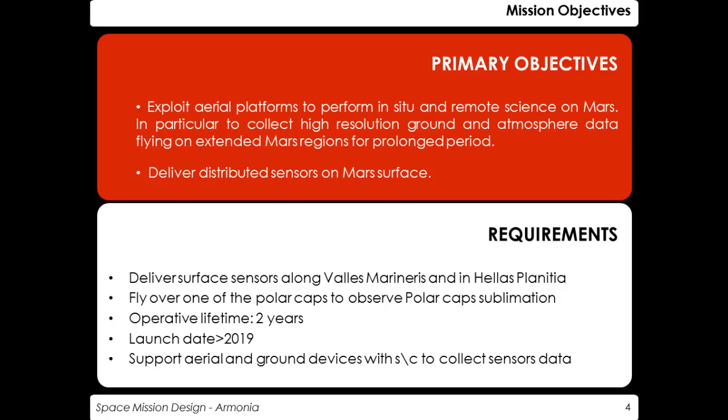All this has to be done with some constraints. In particular, we have to visit peculiar regions like Valles Marineris and Hellas Planitia, and also the polar caps during the period of sublimation. All this while trying to obtain an operative lifetime of at least 2 years, along with some other constraints related to the launch date and the data relay.

Looking more in detail at the phenomena we are going to observe, we have divided them into three major regions. First, in the tropical region, we would like to observe the genesis of local dust storms, dust devils, and other phenomena like the sources of methane.

In the polar region, we would like to observe for sure polar cap sublimation, and again the source of methane. In addition, we would like to remotely observe the residual magnetic field of Mars.

Our mission is based mainly on the use of 3 superpressure balloons as the aerial segment. We decided to deliver 2 to the tropical region and 1 to the polar cap. This allows us to reach the 2-year operational lifetime, since the lifetime of a single balloon is not sufficient to cover the whole mission. This is not done continuously, but at least they will cover the most scientifically relevant periods on Mars.

We will also rely on a dedicated entry vehicle, one for each balloon. This way we can inflate balloons directly in flight, which is the most promising technique for inflating balloons.

This will also allow us flexibility in the regional deployment of our balloons, and also in the timing of deployment. We can deploy them directly on the regions we would like to visit without the need for guidance to reach the most peculiar regions, and we can also try to reschedule the mission if something goes wrong, for example. So it gives us robustness, flexibility, and adaptivity.

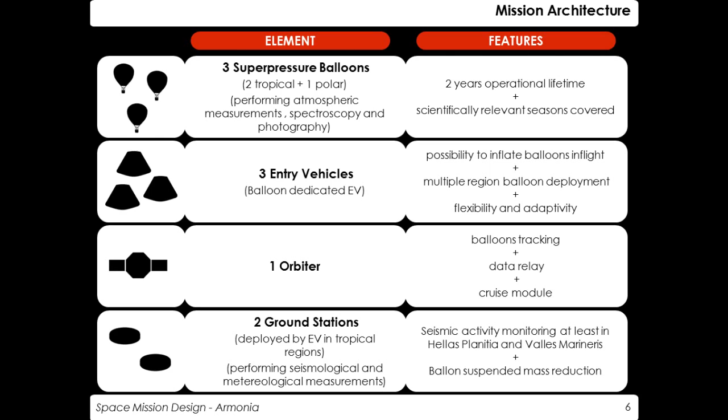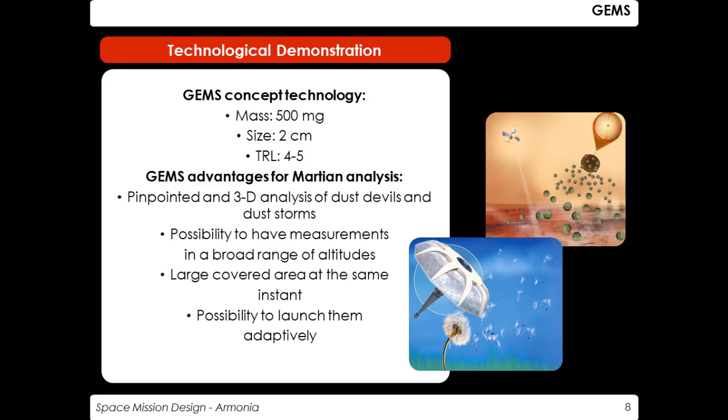Finally, we will have GEMS as a technological demonstration. GEMS are nanoscale sensors. They were first thought of as an alternative to balloons, but then, due to their limited lifetime and some telecommunication issues, they were discarded and then reintroduced as a technological demonstration. They can be released by balloons during a peculiar period or during some relevant events. There are also representative models of the sensor.

Looking at the timescale of our mission, we will mainly have 3 phases. After the launch, we will have the transfer from Earth to Mars. Then we will have an aerobrake of about 150 days to save more propellant and make the mission feasible. And then we will have the 2 years of operational lifetime, ending with the disposal.

Looking more in detail at the operational lifetime, we will first have a 1 month setup, during which we will observe Mars and try to set up everything, and maybe reschedule something or be adaptive to the mission.

Then we will have the 18 months measurement campaign, during which there will be released the 3 balloons, according to what we have decided.

Finally, we will also have a buffer slot of 5 months for further measurements, or if the balloons survive longer than expected we can keep collecting data, and also from the ground station we could keep collecting data. We could also rely on releasing balloons in common periods to try to have simultaneous measurements.

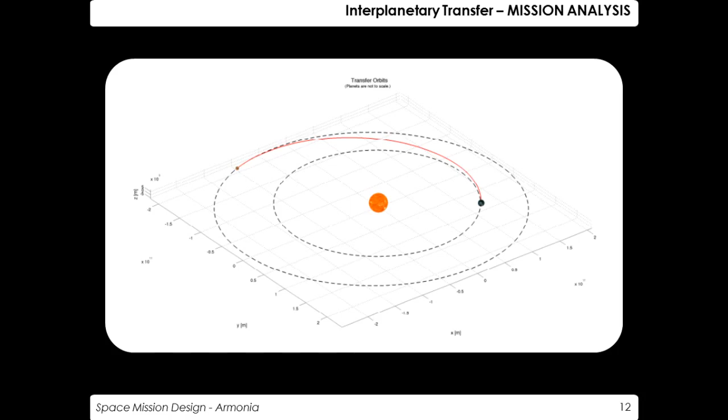For the insertion into the operational orbit, we first considered a direct transfer with a one-shot maneuver, but this gave a delta V of 2 km per second. Since we have a massive dry spacecraft and the delta V is quite high, no launcher is usable to launch such a high mass with the given C3 we have, so we need to reduce the delta V required to insert into the operational orbit.

What we selected was an aerobraking maneuver. We chose it because it's flight proven twice at Mars, it doesn't prolong the interplanetary transfer too much, it doesn't have strong requirements on the spacecraft configuration, but it leads to large delta V savings.

We used a simplified model for the simulation: we neglected Mars rotation and assumed an exponential model for the atmosphere. For the initial orbit, similar to the MRO mission, the apocenter is just inside the sphere of influence of Mars, and the pericenter equals the operational orbit we selected.

During the aerobraking regime, we will have a pericenter of about 100 kilometers. This was chosen to minimize the duration and have acceptable thermal and structural loads.

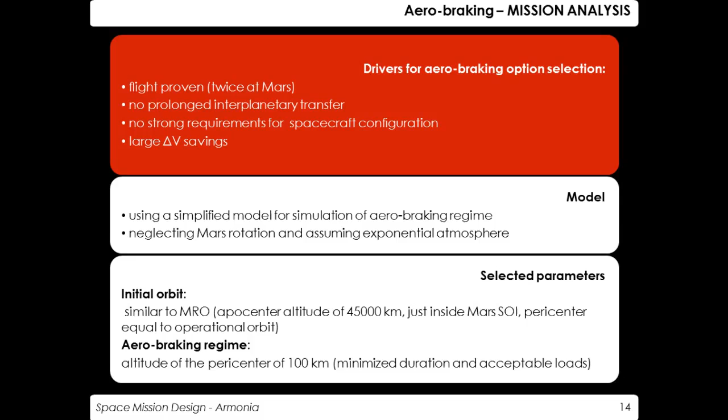So this is the result we get: a delta V saving of 1.2 km per second that leads to a huge mass reduction.

The possible issues were analyzed and solved, since there were almost 5 months to reach the operational orbit, which is fine within the mission timeline. The thermal and structural loads were also analyzed and found acceptable.

For the operational orbit choice, our driver was maximizing the time in view of the aerial and ground segment, so we took data from the simulation of the balloon motion and considered some latitude ranges.

These were taken into account, along with a constraint on at least the possibility of deploying a balloon near the pole, and an altitude of the pericenter not too low, in order not to have too much drag and thus too much station-keeping delta V. We also had some nice-to-have constraints.

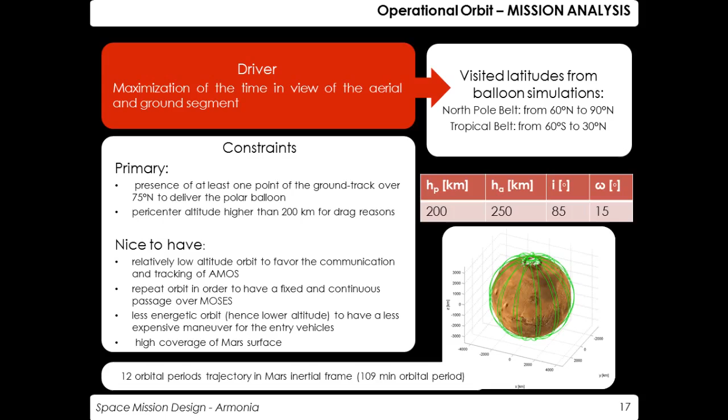Here is represented the trajectory in a Mars inertial reference frame for 12 orbital periods, and you can see it's not a repeated orbit.

For the entry vehicles, we selected a procedure to release them, as follows: we acquire a release orbit slightly lower than the operational orbit, we release the entry vehicle and the related structure, as will be explained later, and then we return to the operational orbit.

For the trajectory of the entry vehicles themselves, our driver again was delta V minimization. We use a model for the orbital phase and the first order Allen model for the atmospheric phase. We had constraints on the velocity at which the supersonic parachute will be released, and also considered the flight path angle, in order to minimize delta V and keep the entry vehicle inside the atmosphere.

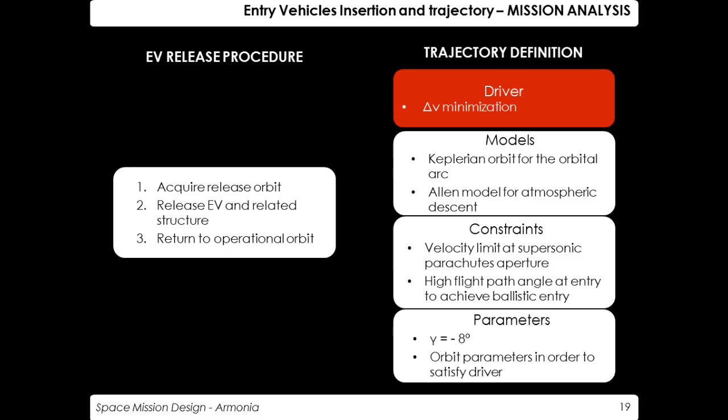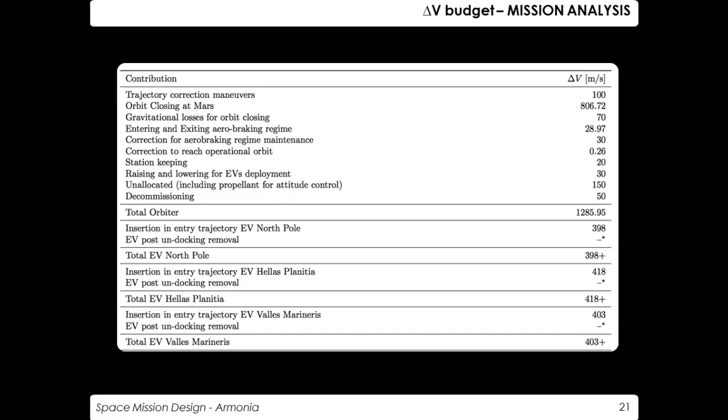Finally, I will present the delta V budget, covering the contributions I didn't highlight before: trajectory correction maneuvers, correction during the aerobraking regime to keep the pericenter altitude constant, station keeping contribution, and decommissioning phase. The delta V budget was made not only for the orbit, but also for each of the entry vehicles. I will now leave the stage to Claudio Pulsi, who will tell you all about the balloon design.

Thank you. I will try to explain the process that brought us to the design of the balloons that support the aerial platforms. First, an analysis phase during which we studied the environment of Mars, selected the technology for the balloons, and asked ourselves whether we wanted to rely on a guidance, navigation and control system on the platforms, plus the strategy for the buoyancy of the balloon.

Then a sizing phase, during which we computed the dimensions of the balloons and chose the material for the envelope, and finally produced two numerical models as validation of our design: a thermodynamic model and a flight dynamic model.

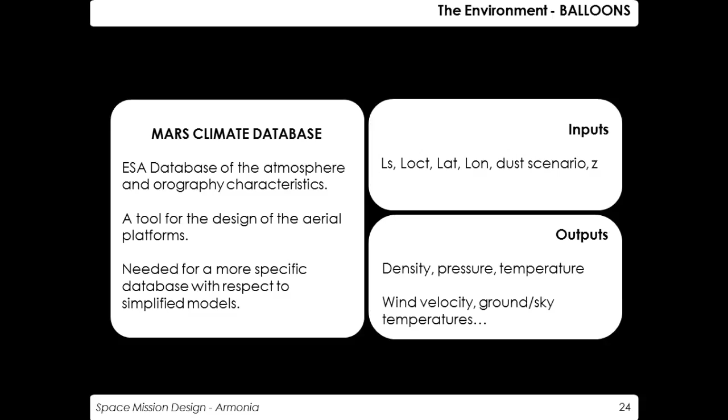For the environment, we used as a tool the Mars Climate Database from ESA, which takes as inputs space and time coordinates on the surface of Mars and gives as outputs the main properties of the atmosphere, such as density, pressure, etc.

For the technology, we investigated existing options, but in the end we selected the superpressure balloon.

The superpressure balloon is actually a balloon that has a constant volume, supported by a higher internal pressure always greater than the environmental pressure, and it flies at a constant density level. The positive aspects of this technology are that it has already been used in the Vega mission in 1985 on Venus, it has a longer lifetime compared to other technologies, and it has a simpler design because of the constant volume. The negative aspects are related to the fact that since it has a constant volume, the buoyancy capability relies on the external density of the atmosphere.

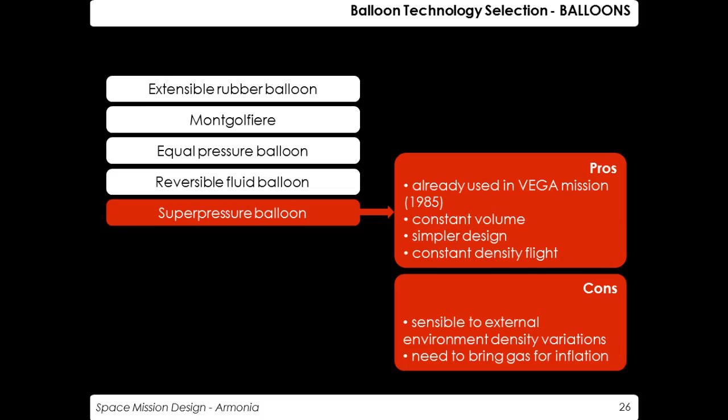For what concerns the guidance, navigation, and control system, this technology has already been investigated by NASA, as a sort of wing attached very far below the balloons, in order to experience different atmospheric conditions and produce force that could direct the motion of the balloons.

With this technology, we could have optimized the exploration capabilities of the balloons and performed maneuvers to avoid impacts from orographic obstacles. But we would also have increased the complexity of our system, increased the mass, and increased the dimension of the balloon.

So we decided not to rely on a GNC system, but rather on free motion of the balloon. A proper design of the floating density of the balloon was needed.

As I said, the superpressure balloon flies at a constant density level. So we had to choose the density through some criteria, and we created a model of isodensity surfaces in the atmosphere of Mars, marked with two performance indexes, such as the altitude experienced by the balloon.

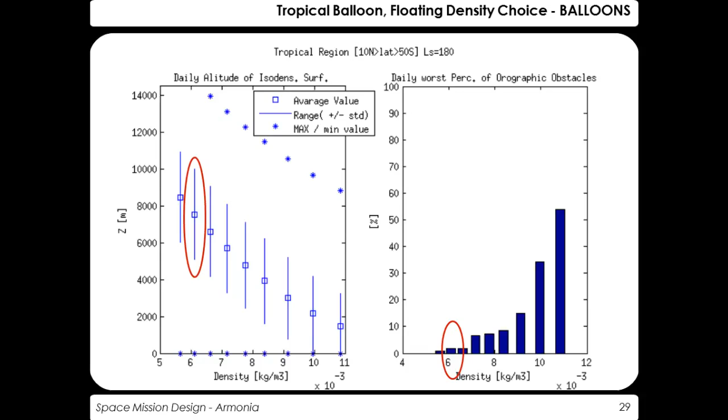For example, for the tropical balloon, we made a compromise on the percentage of orographic obstacles at that density value, and an altitude low enough to properly do the scientific operations.

And so, as you can see, we also have visible criteria to observe the results that we obtained.

For what concerns the balloon sizing, we followed static dimensioning through the Archimedes principle and exploited the two concepts on which superpressure balloon technology is based: superheat and superpressure. Superheat is the delta temperature across the envelope of the balloon, which must stay within assumed values, and superpressure is the delta pressure across the envelope, which must always be greater than zero.

With those as inputs, we came out with the actual sizing of the dimensions of the balloon.

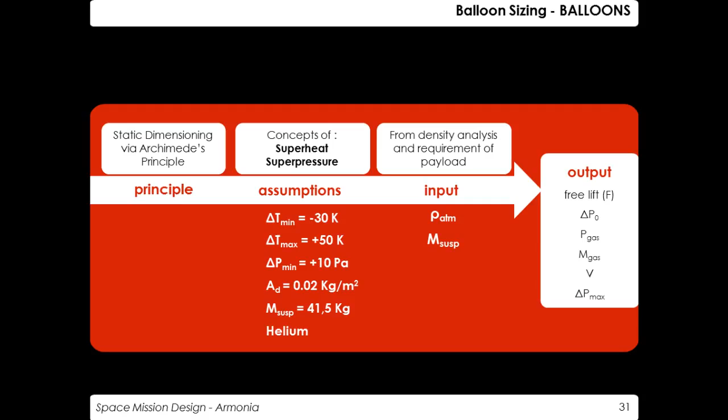For what concerns the material, we chose to rely on a composite envelope material in order to match all the requirements such as strength, stiffness, and in particular permeability of helium, because we wanted to increase the lifetime of the balloon. The UV resistance is also a major concern in the atmosphere of Mars.

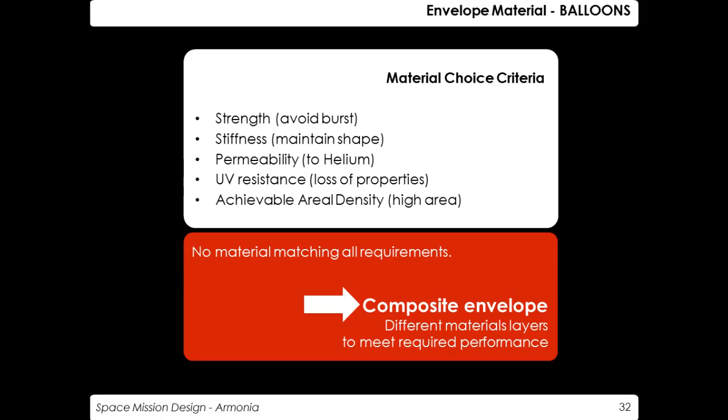We selected a 3-layer composite material: low density polyethylene on the external side, fiber spectra in the middle, and mylar inside. Two designs, one for the polar balloon and one for the two tropical balloons. The tropical balloons are bigger because they rely on a lower floating density.

In order to validate the assumption on superheat and superpressure, we made a thermodynamic model of the balloon, considering all the thermal sources, including internal reflection and transmission, and convection, natural inside the balloon and forced outside considering the winds.

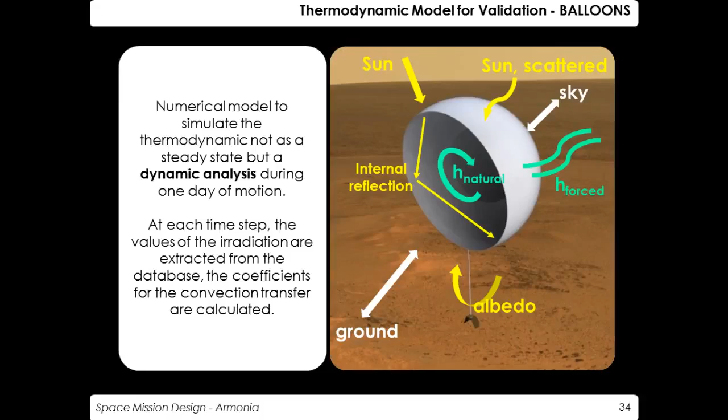We had to check that the superheat delta temperature was always under an upper limit, and the superpressure higher than a lower limit. And we checked that the design could actually work.

As a last tool for validation, we made a fluid dynamic model of the motion of the balloon, extracting from the Mars Climate Database a mesh for the atmosphere of Mars that provides, for many points on the surface, inside the atmosphere and over time, information on the characteristics of the atmosphere.

We simulated the vertical and horizontal motion in order to understand if the correct altitude was reached, and also if the decision to discard guidance navigation and control was made for a good reason.

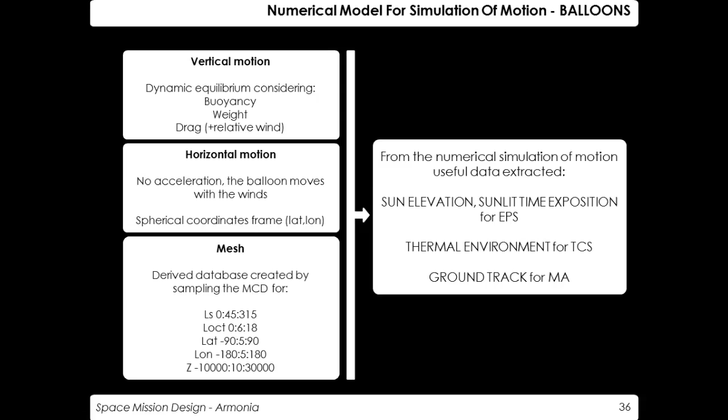We also extracted from the simulation interesting results for the EPS subsystem, such as sun elevation and sunlit time exposure of the balloons, for the thermal environment, for the thermal control system, and as Amadeo said before, the ground track for mission analysis.

This actually helped us discard the GNC hypothesis, since we saw that the balloons performed the required motion. Now I leave the word to Vincenzo Pesce, who will talk about the payload of the balloon.

Good morning. We talk about the gondola, that is the core of the AMOS segment. We have to perform some analysis and observe some phenomena such as the polar cap sublimation, thus the dust devil formation.

For this reason, we have selected instruments that always have a high TRL, except for the ultrasonic wind sensor, the µMIMAFTS, that is a spectrometer that was developed here at PoliMI.

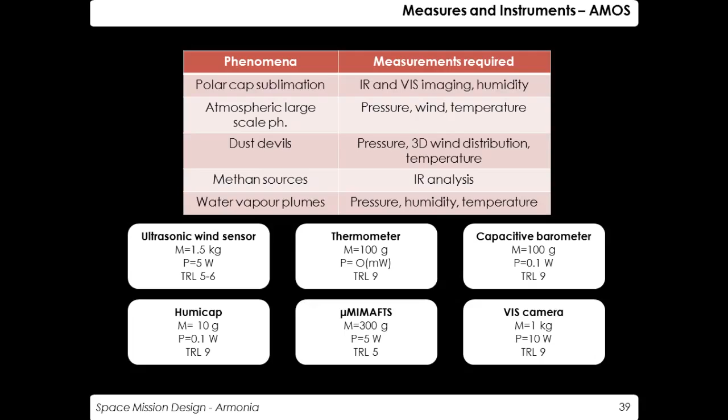Going to detail of the configuration, the main driver of the configuration is the power requirements, because we have to face the low irradiance levels present on Mars. So we have to have larger solar array area, in order to also satisfy the constraint of the volume, the limited volume of the entry vehicle.

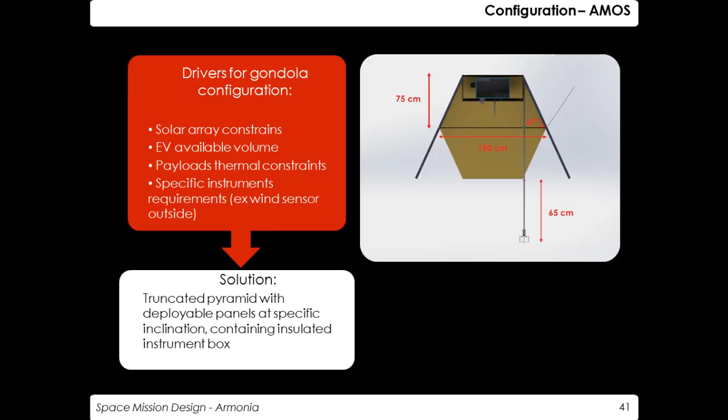We have decided to have a truncated pyramid with extendable body-mounted arrays. Going to detail of the configuration, we have this kind of electronic box with a radiator in the bottom part connected with its switches.

The video shows the deployment of the solar arrays and the deployment of the boom here, the boom of the wind sensor.

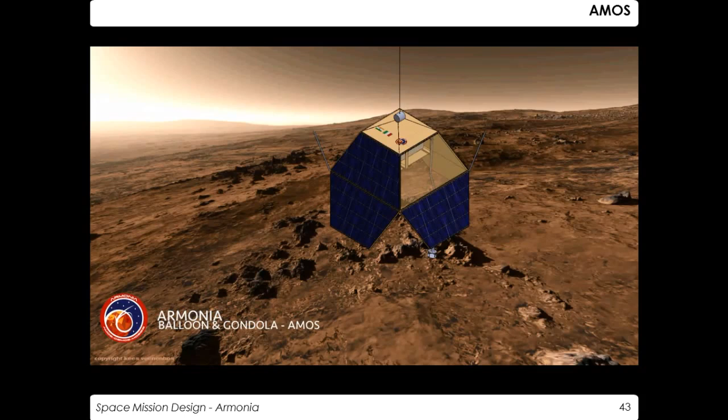Going to detail of the subsystem, we start with the electrical power subsystem because it's the main driver for the configuration. So we have decided to have a classical, reliable photovoltaic system with 4 extendable body-mounted panels.

And the secondary battery, we have decided to use a lithium-ion battery. We have also decided to have a sizing strategy for this kind of subsystem, because fixing the area and knowing the irradiance during the day, we know also the available power for our system. So knowing the value required by each subsystem in each mode, we can try to fit the shape.

Here we have science mode and telecom mode that are the modes requiring more power. So we can always satisfy the requirements in terms of power with our available power.

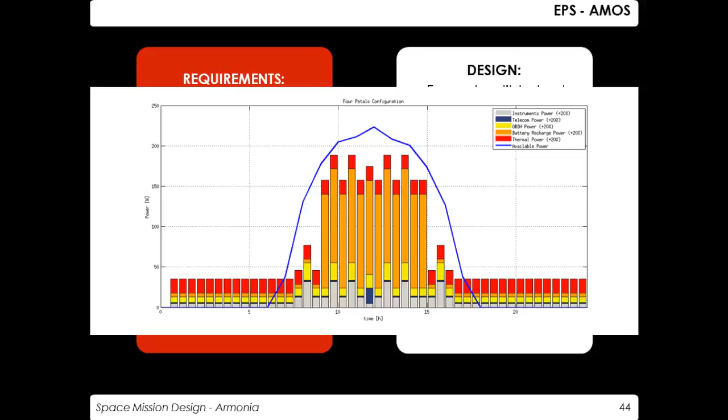Here we have the power budget and the mass budget of the system. We have decided to use a PCDU with a direct energy transfer and a regulated bus, mainly because of the presence of the lithium-ion battery.

Then we have the thermal control system that is driven by the low power available. We want mainly to remove heat from the hot equipment during daylight, but we also want to minimize heat losses during night. In order to do this, we have decided to have a night thermal insulation, also a variable thermal conductive path. Going to detail of the configuration, we have this box, the electronic box, connected to the radiator.

As already said, with 4 paraffinic switches, this allows us to dissipate heat from the electronic box during daylight, but also to decouple the electronic box from the external environment during night.

We have also the electrical heaters unit here and also on the wind sensor, in order to heat up the system, and also 5 RHUs.

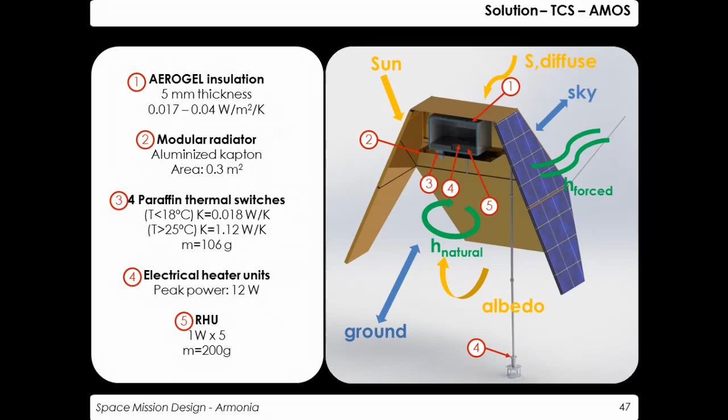With this kind of configuration, we can see how we can respect all the temperature ranges for each element, both in the worst hot case and the worst cold case.

Here we have a mass budget and a power budget. We have decided not to use MLI because of dust and atmospheric issues, and we are focused on the study of the thermal conductive path because it's critical for a strong design of the thermal control system.

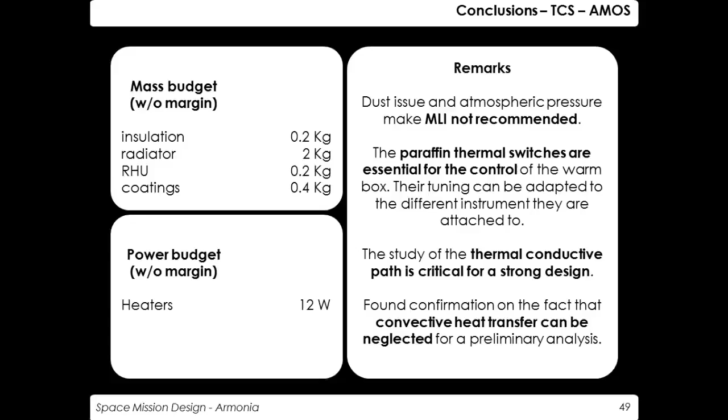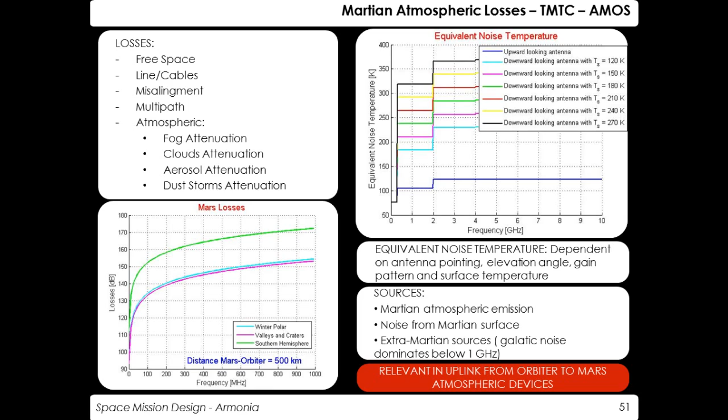We've also made an analysis on equivalent noise temperature, considering an upward-looking antenna and a downward-looking antenna. With an upward-looking antenna, we can see how the equivalent noise temperature is lower, so we decided to use this kind of configuration.

Going into detail of the link budget, we are constrained on the power, the amount of data, and the visibility windows depending on the orbital motion. So we decided on this signal-over-noise ratio, considering margin and the wanted bit error rate.

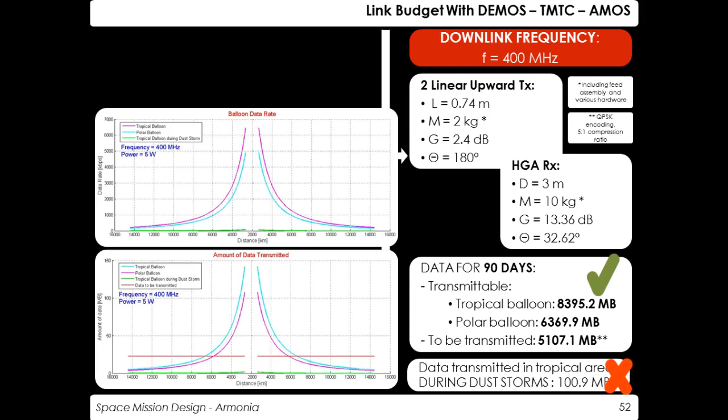We can also see how during dust storm we cannot transmit almost anything. So this is not a good solution, not a good situation for our telecom subsystem. In tropical balloon and polar balloon conditions, we can transmit enough data, but during the storms we can't.

Then we made the finite element model analysis in order to evaluate the loads and the structural response to the loads. Simulating our structure, we evaluated the loads, so gas loads, heavy braking loads, and also the wind on the extended panels during the storms. We have seen how no yielding, no buckling, and no deflection of the boom tip occurs during the storm.

So I will leave the stage to the last part, who will explain the ground station of our mission.

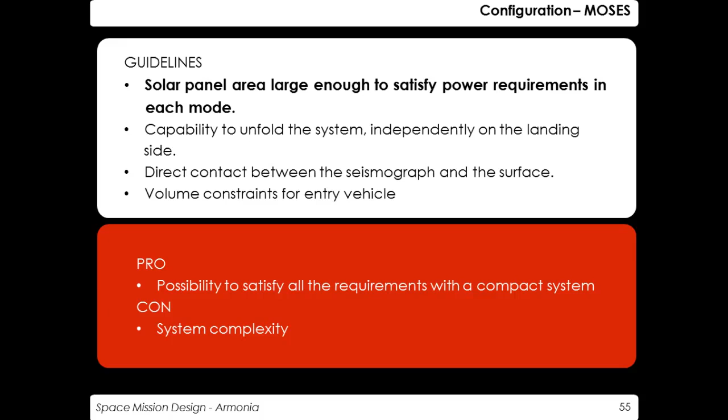Good morning, everyone. I'll be talking about the ground station, also known as the Moses. Starting with the configuration, we had two main drivers for the configuration we selected. The first was that the ground station had to be small enough to fit inside the limited volume of the entry vehicle. The second was that the solar panels, used to power the instrument, should be big enough to last the entire lifetime.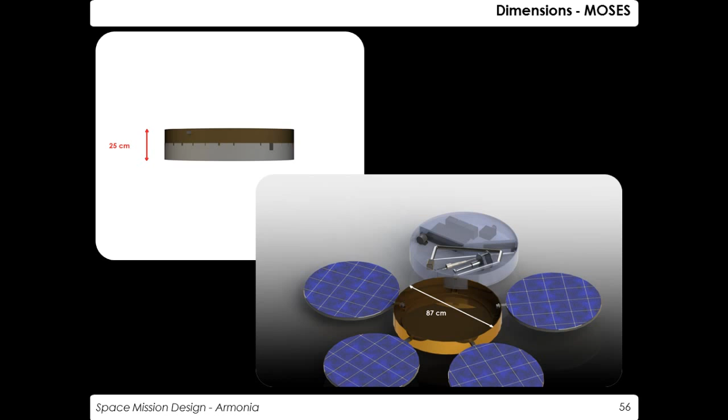Based on that, we decided on a cylindrical disc configuration, 25 centimeters high and 87 centimeters in diameter. It was divided into two sections. First, the top half contained the 4 deployable solar panels, which would be deployed whenever needed. The second half was again divided into two sections, one called...

The warm box. As you can see, it contains all your batteries, PCDU, amplifier, and electronic equipment, while the second half contained all your instruments and sensors needed for the mission.

As you can see in the demonstration, once the ground station touches the surface, first the solar panels are deployed. Secondly, we have a robotic arm which will be used to deploy the seismometer on the ground, to avoid any sort of noise in the data. Then we have also considered using telescopic booms to deploy all the environment sensors, so there is no interference from the ground station to the readings.

As you can see, we have a linear antenna also, and this displays your pressure sensor and temperature sensor booms.

Moving on to the electrical power subsystem, as you already saw, we had 4 deployable solar panels, accompanied by a secondary battery. This was mainly driven by two factors: first, the specific power, and second, the reliability of the system. The idea was to meet the power demands during each mode and phase.

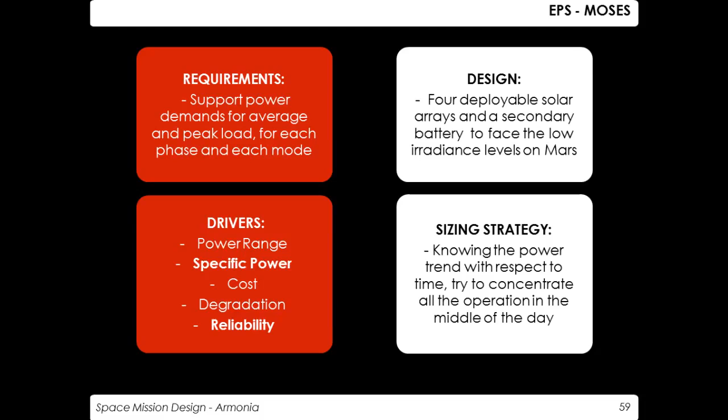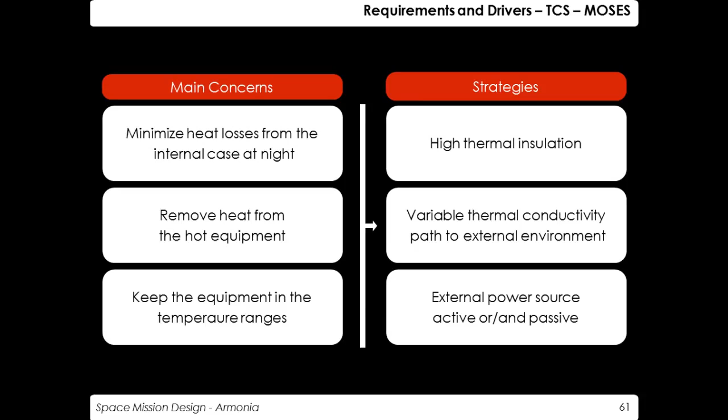Talking about the thermal control, the main idea was the same as the aerial segment: keep the components in their temperature ranges by minimizing heat loss while also radiating any extra heat generated. However, one important limitation for the ground station was its contact with the Mars surface, and during the night that would have acted as a heat sink and depleted the ground station of all its heat. To overcome that and other problems, the strategy applied was use of aerogel all over the surface for insulation, then adding a radiator to the circumferential area of the warm box, controlled by two paraffin-based thermal switches. To heat up the system, we had one electrical heating unit and five radioisotopic heating units, and to finally cover it all up, we wrapped it in golden coating.

Then to conclude the thermal control subsystem, I show you the mass and power budget. One of the proposed technologies here was to use mini loop heat pipes to guarantee a uniform distribution of temperature, being a lightweight alternative.

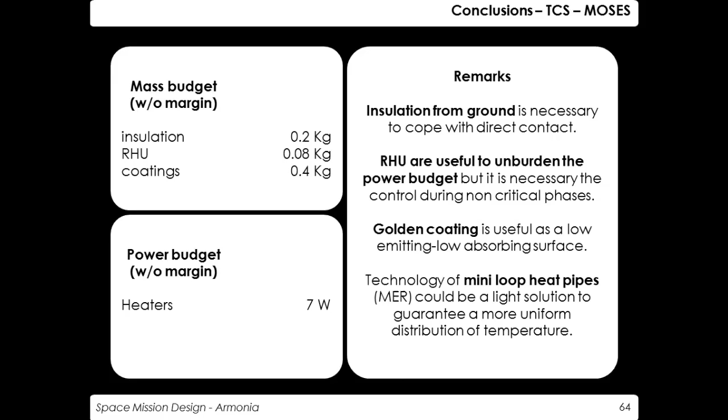Moving on to the onboard data handling, the main driving factor was the selection of the sensor suites that we had. Since we had mass limitations, we tried to find sensors with built-in application-specific integrated circuits. As a result, we decided to use a single electronics board containing a processor capable of delivering 25 megahertz, connected to the sensors using a 1553 data bus, with all data managed using an integrated remote terminal unit. Finally, we had a local data bus to connect the RTU with the processing units, and 16 GB of onboard storage to store all the scientific data.

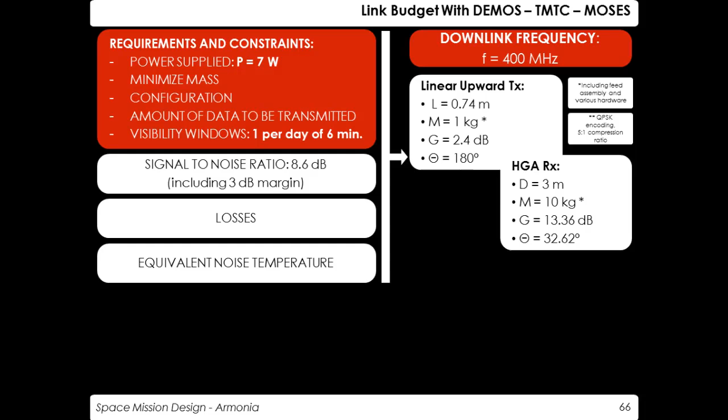Finally, to transmit all the data, we move on to the telecom subsystem. Since we had no regulation on bandwidth usage in the Mars environment, the main drivers came from the power available to the system, around 7 watts, and the losses specific to the Martian environment, as mentioned earlier. Taking that into consideration, we used a signal to noise ratio of 8.6 dB, and came up with a frequency of 400 megahertz, transmitted using a 0.7 meter long linear antenna and received by a 3 meter wide parabolic antenna on the orbiter.

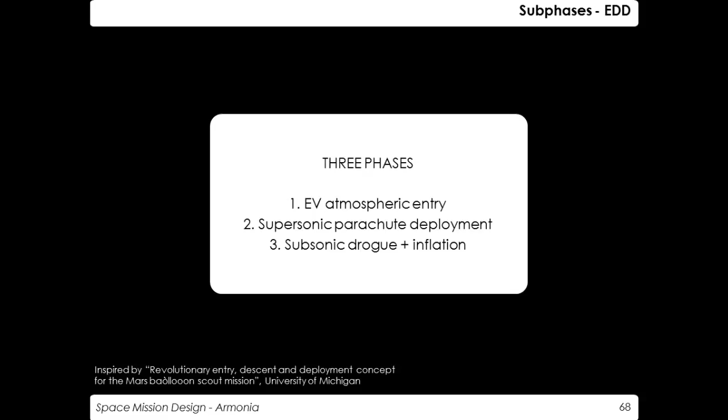Good morning, everyone. I will guide you through the most critical part of the whole mission, probably: the entry vehicle entry, the descent of it, the parachute deployments, and the balloon itself that is deployed and demonstrated. We can divide this macro phase into three sub-phases: first, the entry vehicle atmospheric entry; second, the deployment of the supersonic parachute; and third, the subsonic drogue inflation with the parachute, with the balloon inside. This is a sketch for the whole phase: 1 and 2 are the entry vehicle, 3 and 4 the supersonic parachute deployment, and 5 and 6 the subsonic drogue release, the violet one, very big, with the balloon inflation inside.

So starting with the first one, we consider the entry in the atmosphere of the entry vehicle at an altitude on Mars of 110 kilometers. One major constraint was to assure a velocity at 20 kilometers in altitude below 400 meters per second, in order to assure correct deployment for the supersonic parachute.

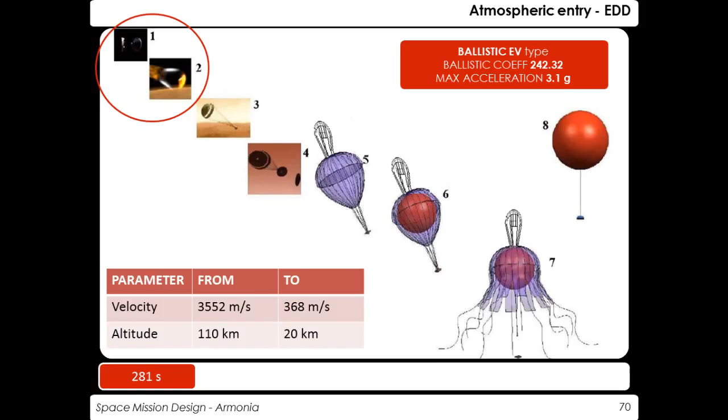And actually we have managed it quite well, because from the simulations, in 281 seconds of exploitment of the drag of the entry vehicle, we arrive at 368 meters per second. We experience a maximum acceleration during this phase of 3.1 Earth Gs, and that's it for the entry vehicle.

Then, at the end of this phase, the supersonic parachute is released, a 6.5 meter diameter disc gap band type. It's pretty big, but it has to do its job. In 40 seconds of operation, we go from 20 kilometers altitude, when it has been deployed, to 13 kilometers in altitude, lowering the velocity down to 110 meters per second.

Then we enter the most critical subphase of all, the inflation of a very huge subsonic drogue, as I say, the violet one. Here the system is composed of three main subsystems: the balloon here in red, actually inflated, the subsonic drogue in violet, and a pre-parachute that is a cross-type parachute.

In the drogue, in the envelope, you can see these are scoops in which ram air can be taken in order to have a proper displacement working with the pre-parachute. There are two main jobs that the subsonic drogue has to fulfill.

One, of course, to slow down our system. As you can see, being really huge, it can slow down to 22 meters per second. And the second one, to prepare a protective environment for the inflation of the gas cell.

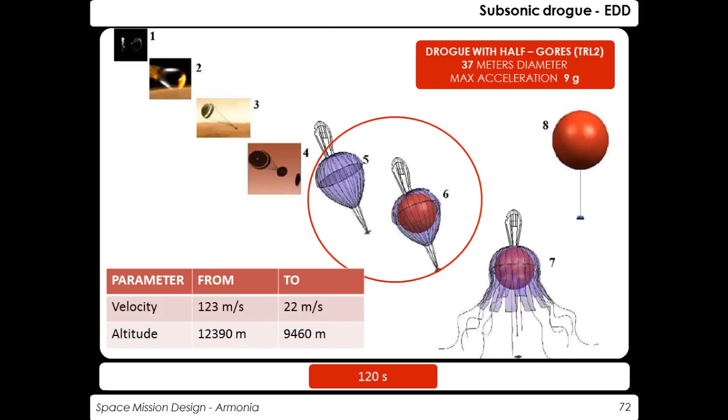So we can see that inflation is completed, as seen before, at about 9.5 kilometers in altitude. At this point we need to release the subsonic drogue in order to provide steady state flight for the balloon. What we have in mind is, first of all, we release the ropes here.

They are nylon-made ropes with USA military standards. There is the rip-off of the stitches here, as you can see, and with the help of the ram air intaking from below and through the pre-parachute, which is still deployed, we have the slip-off of the whole drogue. That is because we complete the inflation before reaching the steady state density of 8,000 meters.

This is the case for the tropical balloon. Actually, the polar one is even lower, so it's even better. The stitches rip off, the drogue slips away, and we have complete steady state flight for the balloon.

We need 15.5 kilos of helium that must be inflated in 120 seconds. So here is the mass flow rate, about 130 grams per second.

And so where is Moses, our ground station, in everything here? Moses is attached to the back of the heat shield. So towards the end of the supersonic parachute phase, the heat shield is released, with Moses attached on the back.

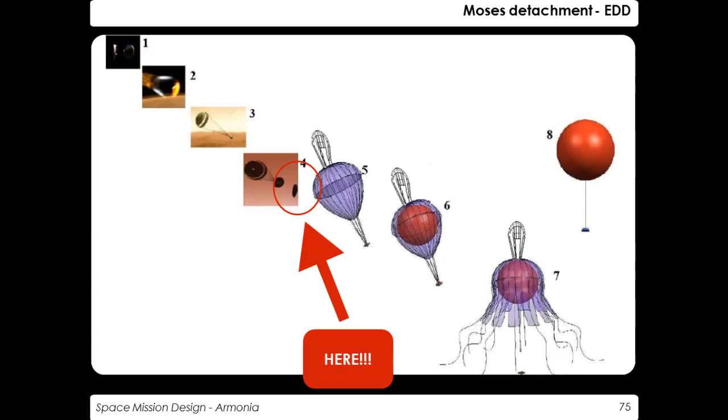Then Moses deploys its parachute, a disc gap band type model, same as the one used for the supersonic phase of the entry vehicle. There is the detachment of the entry vehicle and relative structures still attached to Moses. Then, before touching the ground, airbags are inflated in Moses in order to have a correct impact.

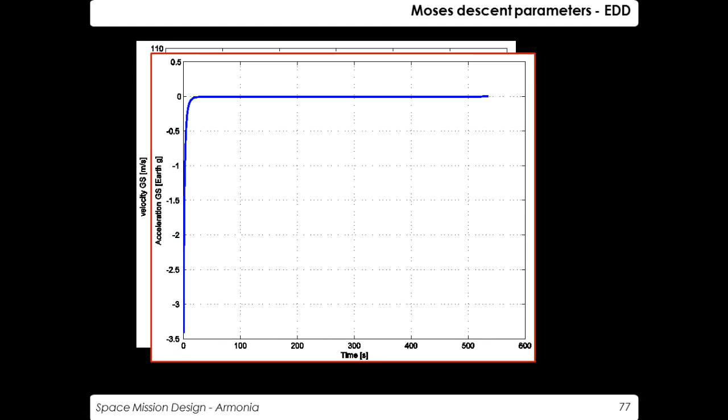It's quite linear because steady state on the descent, as seen here in acceleration, is reached quite fast. The overall descent lasts for 515 seconds, until the impact.

This is the brother of the rendering behind me. Beautiful, Moses. And now let's talk a bit about the entry vehicle, the inside of the entry vehicle with its subsystems.

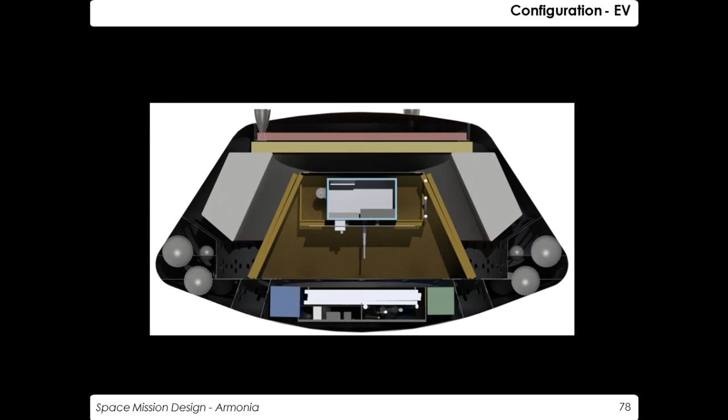We have 12 helium tanks dedicated to the inflation of the balloons. These are radially and equally spaced and displaced in the entry vehicle, as you can see. There is the propulsion subsystem, pressurizing and feeding system here, so 2 tanks for the mono-methyl hydrazine and 2 tanks for the nitrogen tetroxide, with 2 tanks of helium for the pressurizing system.

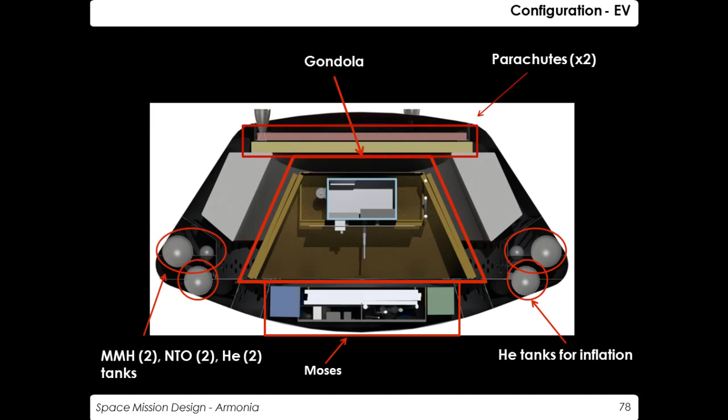There is Moses, our ground station. So as you can imagine, this is one of the tropical balloons because it has Moses inside. There is the gondola in its folded configuration, with folded solar panels here and here. We have the 2 parachutes: the red one is the supersonic one, and the yellow is the subsonic one. And we have the balloon cell, as you can see, quite big.

To validate our shell of the entry vehicle, we performed a CFD analysis to validate our models for the descent, using a computational fluid dynamic analysis with CO2 flow, since Mars atmosphere is 97% CO2. We obtained a drag coefficient of 1.45, which is quite accurate compared to literature values that are usually between 1.4 and 1.5.

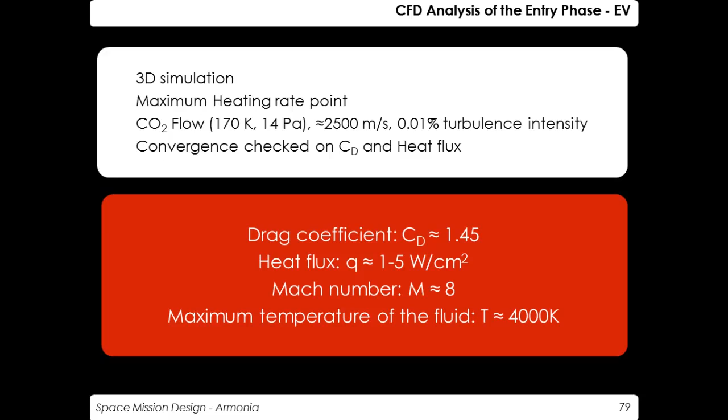For the structural analysis, using a finite element model, we designed an aluminum alloy shell, taking into account the gravitational acceleration and the pressure that has to be sustained during descent. Due to the very thin atmosphere on Mars, we have a peak dynamic pressure of 3,500 pascals onto the heat shield, with an acceleration inside for the various masses of 17 Gs.

The numbers were really small - stresses here are very, very far from the aluminum yield stress value. We are at about 9 megapascals of maximum stress onto our structure. For an even more conservative design, we modeled the external shell to sustain all loads without considering any internal reinforcements, so with internal reinforcements the situation would be even better.

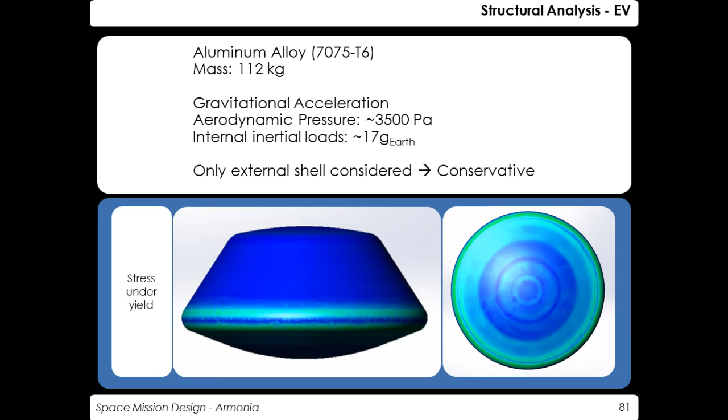Talking about the attitude control system, we have a requirement for precision landing to have no lift component from the aerodynamic force. We provide this with a PID and pulse width pulse frequency modulation controlling our four secondary thrusters. Our main goal is a pointing error with respect to velocity vector of the vertical axis of our entry vehicle less than 1 degree, and we obtained a very nice value actually lower than 0.3. Disturbances have been modeled with a strong white noise, so the system stiffness is proven.

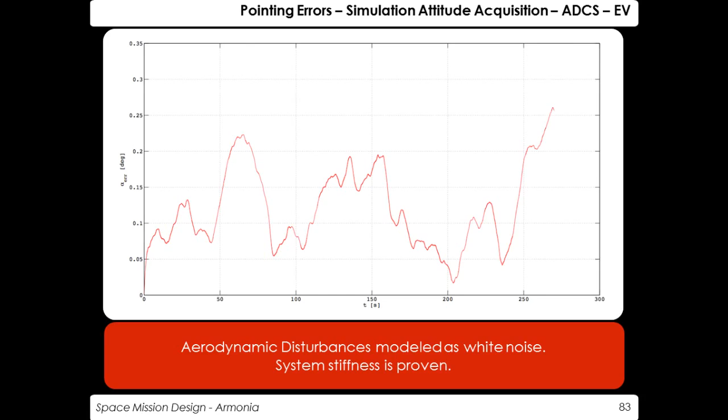Then we talk about the propulsion subsystem, which has to perform the deorbiting kick and the attitude control, as already said. The delta-V has been tailored by Amedeo, our mission analyst, for every entry vehicle in order to save mass, because our main driver is always mass saving due to the huge components we have on our mission.

As you can see, there are 3 main engines, numbered 1, 2, and 3 in red, radially disposed, provided by Aerojet, in the class of 110 Newtons, paired with a secondary subsystem numbered 1 to 4 in purple in the sketch, from EADS Astrium, a 10 Newton class for attitude control. The overall system is a bipropellant system - monomethylhydrazine and nitrogen tetroxide.

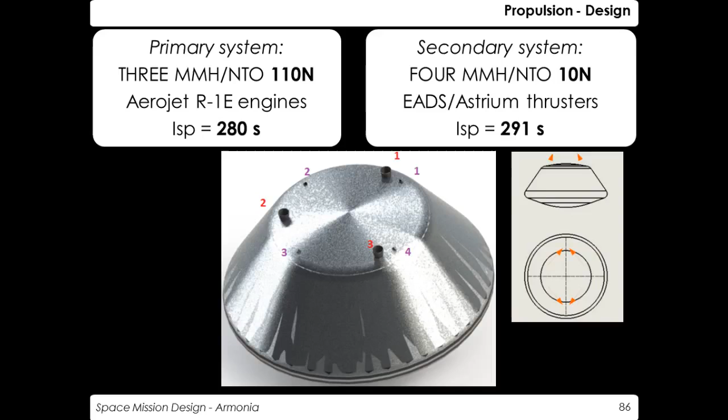On your right hand side you can see a sketch of the direction of flow of the secondary thrusters. It's inclined 48 degrees with respect to the vertical axis to provide torque, and here the spinning capabilities if needed.

This is the sketch for the pressure regulated system. It uses mainly single seat latch valves to control the secondary propulsion system, and double seat latch valves for the primary propulsion system.

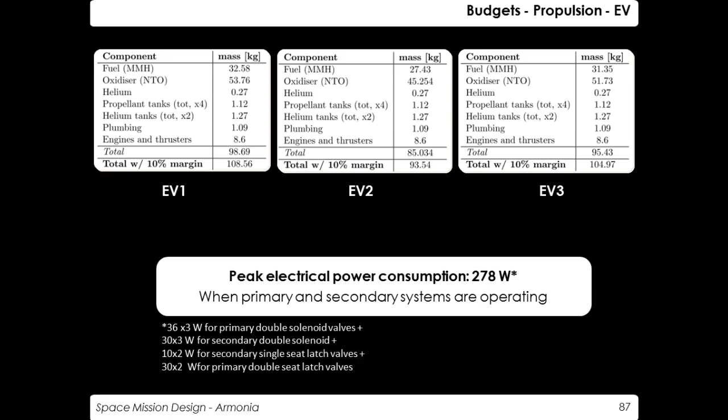This is the mass budget here on top. As you can see, they're quite similar, but we actually saved about 15 kilos more or less by tailoring each of the entry vehicles. For electrical power needs, we have a peak of less than 300 watts that occurs during detachment, with the primary and secondary systems acting on the propulsion system - latch valves, double solenoid, and so on.

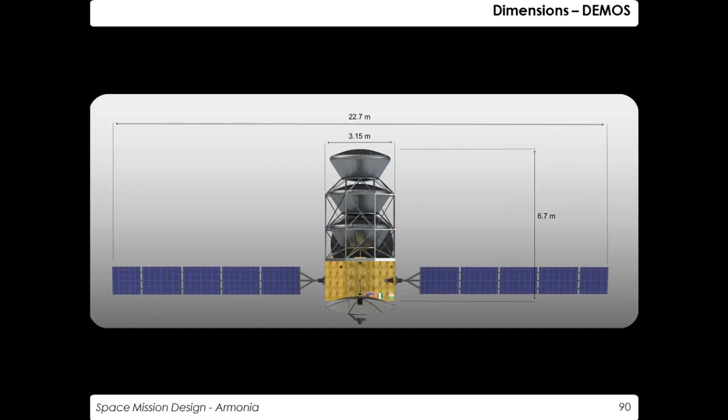This is our orbiter with the three entry vehicles aligned, and the two solar panels. This is the nadir pointing antenna that is fixed, just deployed, and then the attitude control system pointed to Mars, along with the measures of the whole spacecraft.

This is the main section. You can see the main body of the orbiter is devoted to housing the propellant tanks and pressurized tanks mainly, and all the minor instrumentation, plus the external reticular structure to hold the three entry vehicles.

When we deploy the first entry vehicle, we will also deploy the reticular structure that protects the second entry vehicle. To perform this maneuver safely, the main engines keep the orbiter on a safer orbit, far from the reticular structure that has been released.

This mitigates the risk of the mission, because if, for example, the deployment system of the first entry vehicle fails, we are anyway able to detach all the structure and release the second entry vehicle regardless.

For the internal instrumentation, we mainly have the Mars antenna that is just deployed, and the Earth antenna that has two-axis control in order to point at Earth without affecting attitude requirements. We have radiators and star sensors aligned along the solar panel axis in order to minimize sun pointing exposure of these components.

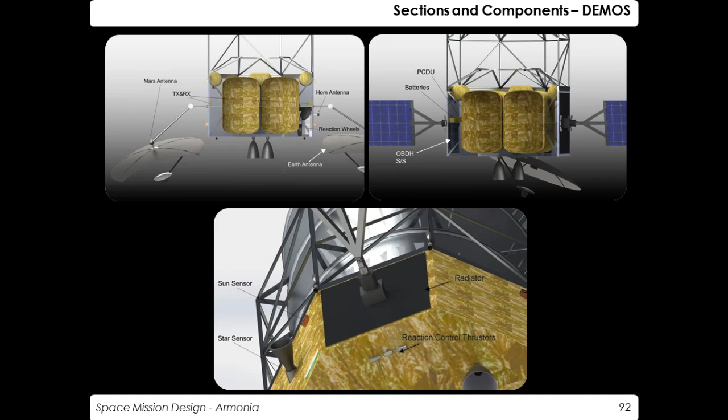This is the operation around Mars with the Mars pointing antenna and the two-axis controlled Earth antenna—those are the only instrumentation carried by the orbiter. The orbiter is mainly a deployer of entry vehicles, but we fit this phase to install 2 cameras and 1 spectrometer to perform additional analysis on Mars.

This is a representation of the deployment of the antenna. Actually, it turns 180 degrees when inside the launcher, with the feed toward the entry vehicle, not as shown starting in this video. But this is the final configuration we obtain when everything is deployed.

The attitude dynamics control system mainly drives the configuration of this orbiter, as I just said. We have a nadir pointing mission basically, and the Earth antenna does not impose any requirements on the attitude dynamics control system. We only require the nadir pointing mission with a nadir pointing error of less than 1 degree, and rotation around the nadir axis to maintain the solar panel orthogonal to the sun within 5 degrees.

We need maneuverability for the deployment because we have to reorient all the main engines to perform the safe maneuver. We need to be stiff during aerobraking and firing modes, mainly during aerobraking with the huge panels that we have—we cannot vary our attitude. And we envisage an emergency maneuver if one entry vehicle fails its deployment.

We need to achieve an emergency slew rate of 1 degree per second using all 4 reaction wheels and the 12 reaction control thrusters. The architecture of the attitude dynamics control system includes 2 star sensors that provide the main attitude determination, and 8 sun sensors that provide almost full coverage of the environment, used in safe mode and to acquire the initial attitude.

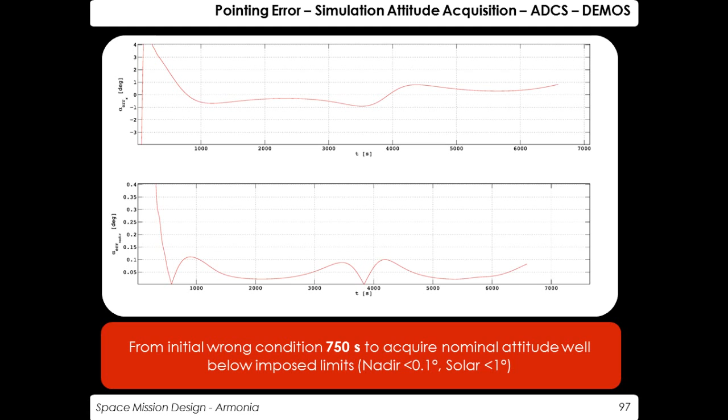The reaction wheels have to perform this work in order to perform the previous maneuver.

The second main concern about the orbiter is the structural part, because we have to provide an external support for the 3 entry vehicles without attaching anything to the heat shield. The design case is the inertial loads present during the launch, but with these huge masses attached to such a thin structure, we have a lot of trouble meeting the frequency requirement of the launcher.

We performed the analysis, satisfied the requirements, and carried out the static and buckling dimensioning, then the modal analysis to avoid resonance with the launcher vibrations. So those are the constraints: the attachment to the back shell, and the minimum frequency. We concluded with an aluminum strut structure with aluminum panels reinforced with bulkheads.

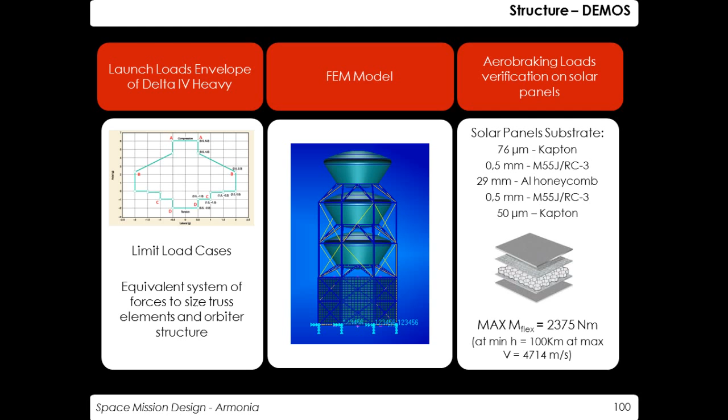Those are the inputs: the flight envelope of the launcher, the Delta IV. We made a finite element method analysis to perform this computation, and we also checked that the aerobraking loads are withstood by the solar panels with this solar panel substrate. This is not a problem, mainly for the hinge, because we obtain this flexural momentum at the root of the solar panels.

According to the mission analysis, we have the delta V to be provided by our main propulsion system, mainly after the launcher injection into Mars transfer orbit. It is only in charge of our main propulsion unit, with 1.2 thousand meters per second of delta V provided.

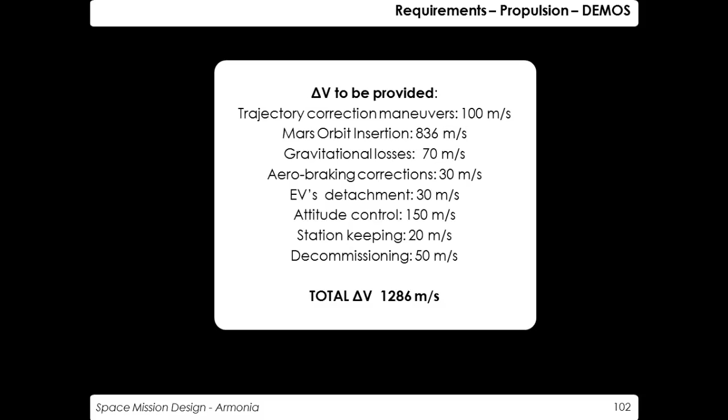The main engines are placed very close to the center of mass to avoid attitude disturbance in case of failure. There are 6 pairs of secondary thrusters to perform all control maneuvers, a class of 890 Newton MMH/NTO primary propulsion system, and MMH/NTO 22 Newton thrusters for the secondary propulsion system.

The mass budget is obviously the most relevant for the whole mission, because we have 1.7 tons of mass for this system, mostly for the propellant, and a peak power consumption of 140 watts to make all the valves and pressure regulation system work.

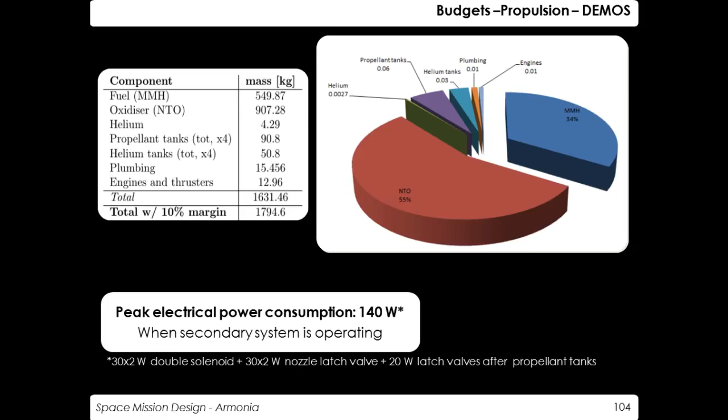For the thermal control system, we have a narrow temperature range to satisfy, and mainly we have to face different configurations after the entry vehicles are deployed. For this reason, we implemented a thermal control system that is stiff against external variation across the different phases of the mission, regulated from global insulation to localized dissipation.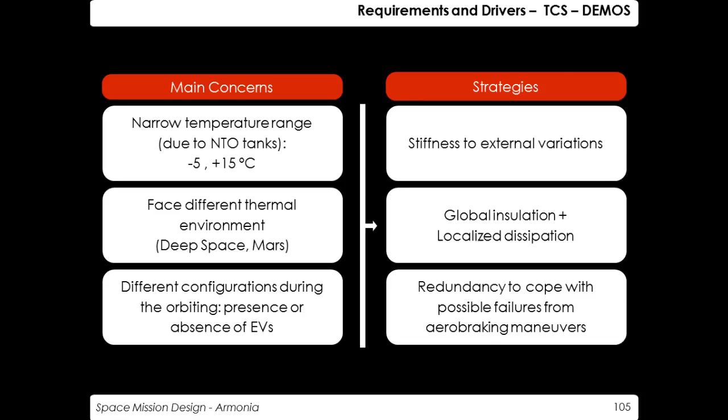This is the solution: the entry vehicles are covered by MLI to protect them during the transfer. We have radiators installed with louvers to better control and tune the deep space dissipation, and we need 365 watts of electrical heater units to keep the payload of the entry vehicles warm enough.

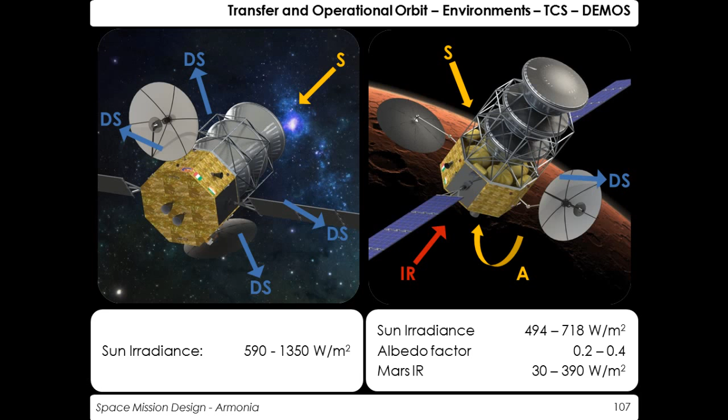Those are the situations we have to face. The sun-pointing attitude during the interplanetary transfer is our most challenging case, because only this face is exposed to sun while the rest of the spacecraft is exposed to deep space. Then on Mars we have a normal configuration for thermal input.

So as I said, the cold case is during transfer for sun pointing attitude, while the hot case is when Mars is at perihelion and our orbit is without eclipses because of the right ascension anomaly.

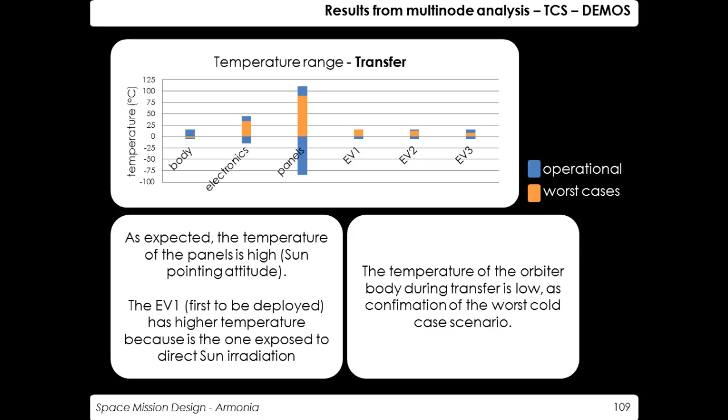But anyway, we are within the ranges for the instruments, because the transfer has the coldest body temperature, and the panels have the highest body temperature since they are continuously pointed to the sun.

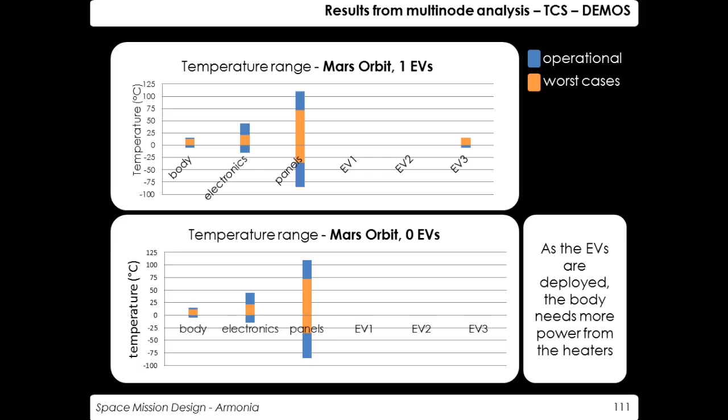While around Mars we have the situation with 3, 2, 1, and 0 entry vehicles. Obviously, with the first entry vehicle we are always well below the required limits. In this situation, the entry vehicles somehow protect the body of the orbiter from dissipation. We lose one entry vehicle, then another, and another, and the body gets colder because of the more area exposed to deep space. So the body needs more power from the heaters.

Now Silvia will present the last system of the orbiter, starting from the OBDH, which is the core of the software part and data handling of our system. The requirements of this subsystem are high autonomy, survivability to high radiation doses of the components, and the high payload data rate that it has to manage.

These high level requirements have to be satisfied considering constraints given by the TRL of the available components, the limitation on the overall mass of the system and on power, and the compatibility of buses with high speed with the components we selected. The solution is found by using the latest available units and components, which should be radiation tolerant.

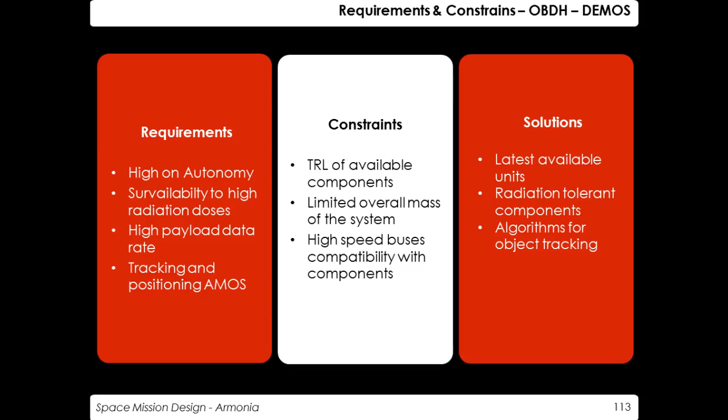Another requirement, as you can see here, is the tracking and positioning of AMOS, the aerial platforms. This was solved using algorithms for tracking these objects.

Looking at the architecture of the OBDH, it is done with a distributed bus to grant high reconfigurability and redundancy. As we can see here, it is made with 2 data management units acting as control: the first dedicated to attitude control and housekeeping data, and the second dedicated to payload data. Each one is made of 2 processors in order to have redundancy.

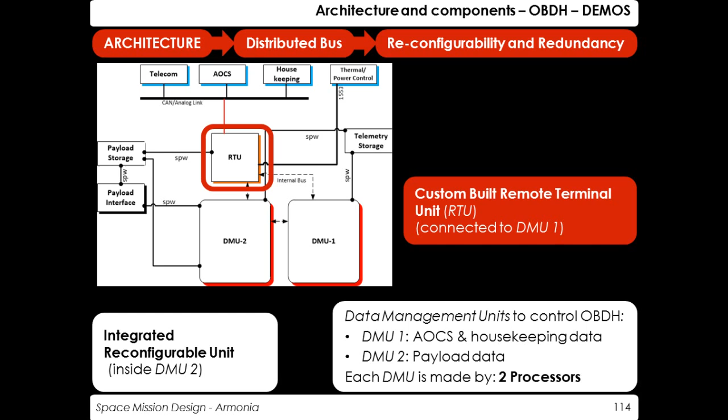Inside DMU2, we have the tracking algorithm implemented, and then we have an RTU connected to DMU1 in order to have connection between the sensors and the platform. Then we have 2 memories to store all the data. Here are some of the components that have been selected, and the tracking software we chose to use.

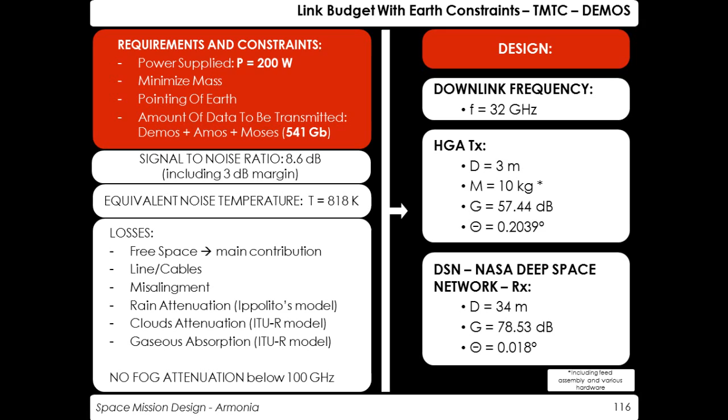All the data collected on the orbiter comes not only from the orbiter itself, but also from the other segments, since the orbiter acts as a relay between the segments and Earth. So with the constraint of this huge amount of data to be transmitted, and the constraints on the power supplied to the telecom system, in order to grant the desired signal to noise ratio, we performed a link budget, selecting as the downlink frequency 32 GHz, with a 3-meter diameter parabolic antenna and the Deep Space Network as receiver.

At the end, I want to present the EPS, since all the subsystems we have seen until now require power. As drivers for this, we use the specific power and the reliability: specific power in order to not increase the mass too much, and reliability in order to not increase the risks, since the mission is quite risky by itself.

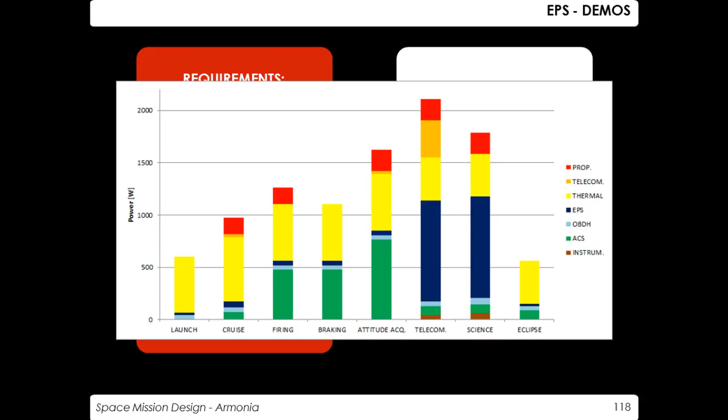The design relies on 2 solar arrays and a secondary battery. Since the requirement of the power subsystem is to support the power demand for both average and peak loads for each mode and each phase, we performed a power budget, and as we can see here, the most demanding phase is the telecom one. This is not only the most demanding phase, but also a recurrent one, since it can take place once per orbit.

The sizing strategy was to consider the power in daylight required for telecom mode. This is the budget we did with a solar array area of 23 square meters, and the selection of the batteries, which are secondary lithium-ion batteries. Since they are very sensitive to charge and discharge, we selected a PCDU with a regulated bus.

At the end, we did an additional analysis in a COMSOL model to simulate the aerobraking, since the drag increases the heating of surfaces. The condition we selected is with the rear face of the panels oriented in the direction of motion during the aerobraking. As we can see here, this is a simulation.

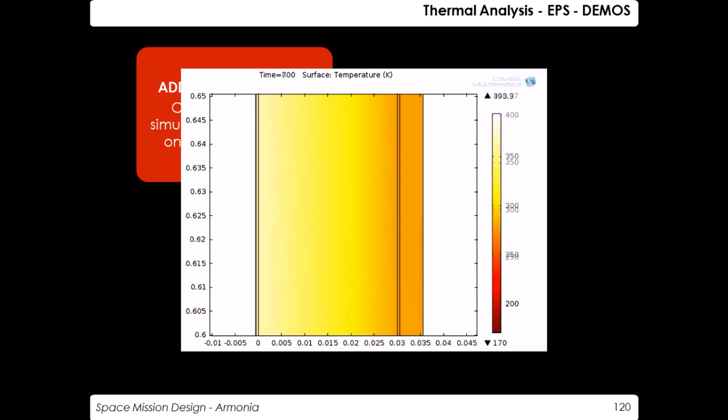Here is the area where cells are placed, and this is the substrate. As we can see, the temperature is lower where the cells are placed, and it always stays under 150 degrees. For this reason, we decided to put all the wirings and connectors on the front face of the solar panel, and each material and process for the array must be investigated for its ability to survive at these temperatures for multiple exposures.

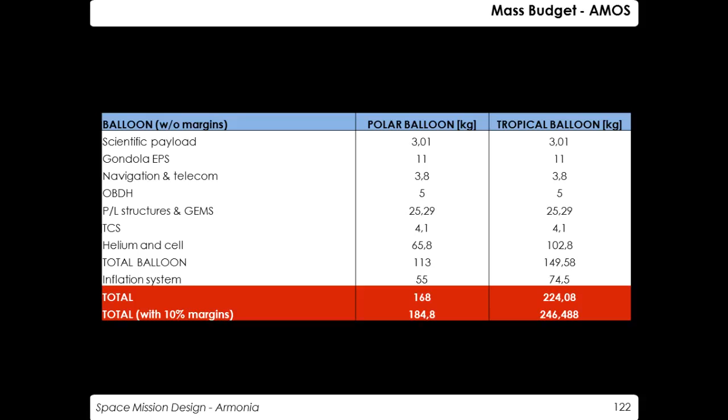Now there is a mass budget, since both have been considered for the overall project. Some drivers we have to take into account, since this is for AMOS, one for the tropical balloon and one for the polar balloon, both of which have quite a huge mass. And while moving to the entry vehicle, the mass increases a lot, which is why it has been a driver for the overall mission.

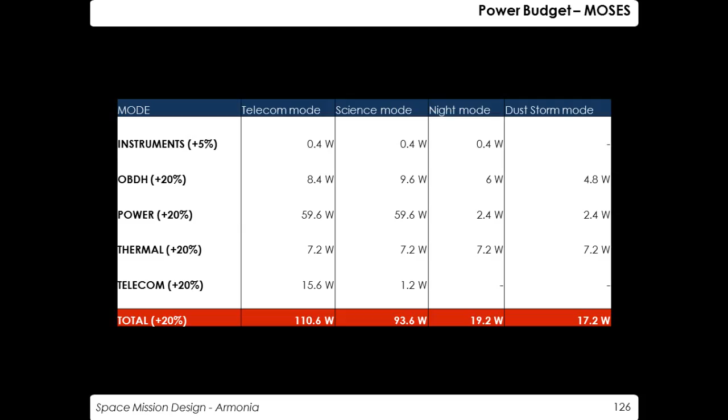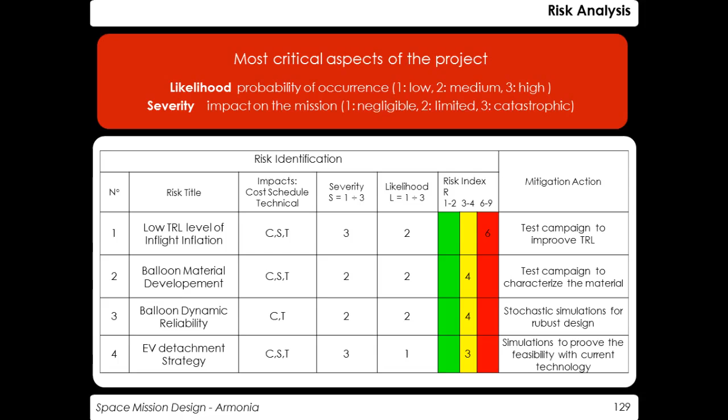Now, to draw some conclusions, these are the most critical aspects of the project we have talked about until now. The most critical aspect is the in-flight inflation of the balloons, since it has a low TRL, which means we have to reduce this risk index, and this should be done with a test campaign in an environment similar to the one we could find on Mars. The other risks in our mission have a lower index.

Considering all these critical points, not only the low TRL of the inflation technology, but also the lifetime of aerial platforms and the low number of ground stations—since we have a requirement of 4 but are only able to have 2—we can say that the mission is feasible because all required scientific data are collected.